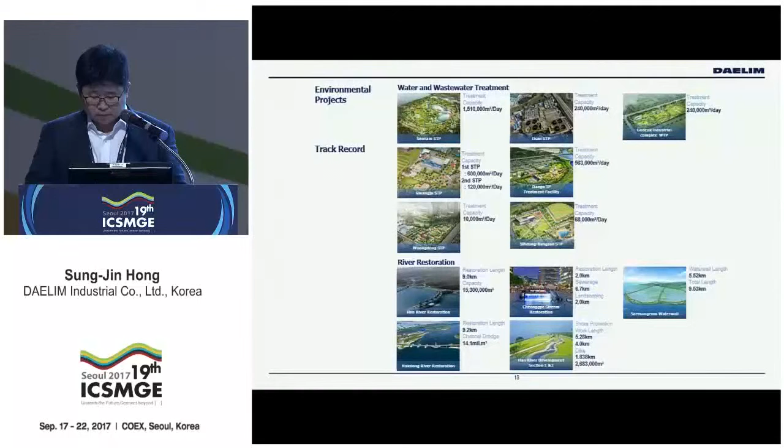Let me introduce Daelim's track record of bridge projects, the main issue of this presentation. Daelim has the best construction techniques in cable-supported bridges, which is the fruit of the most advanced bridge technology. Starting from Dolsan Bridge in the 1980s, Daelim has carried out many cable-supported bridge projects. By successfully constructing Yi Sun-sin Bridge, Daelim became the sixth construction company in the world and the first in Korea to have its own cable-supported bridge technology.

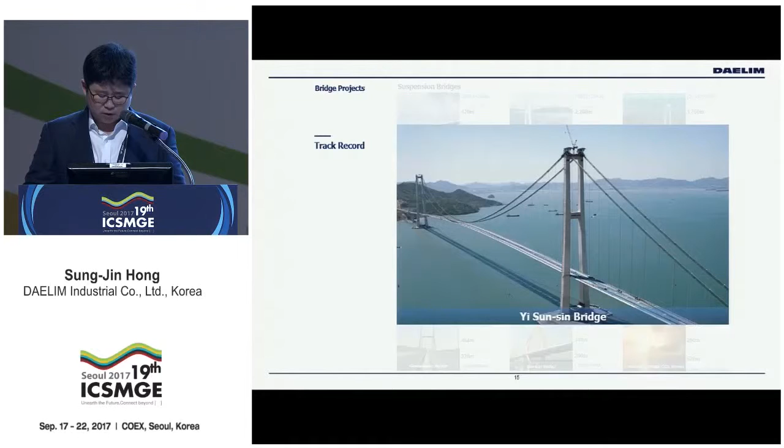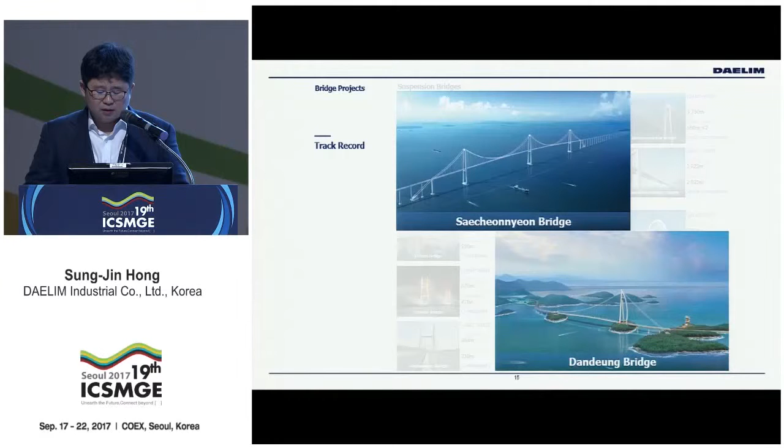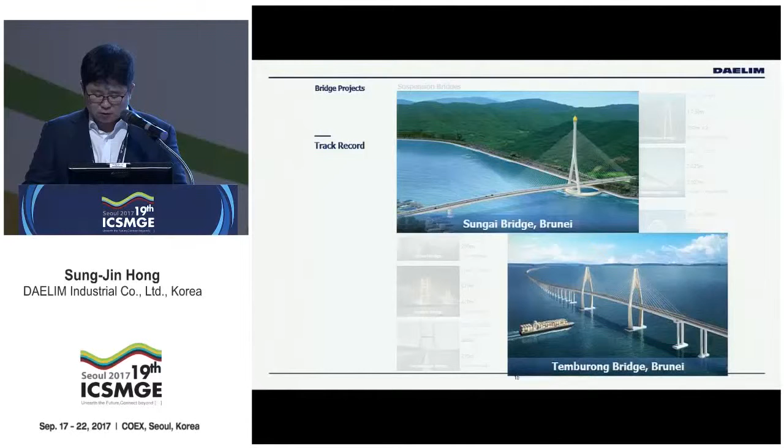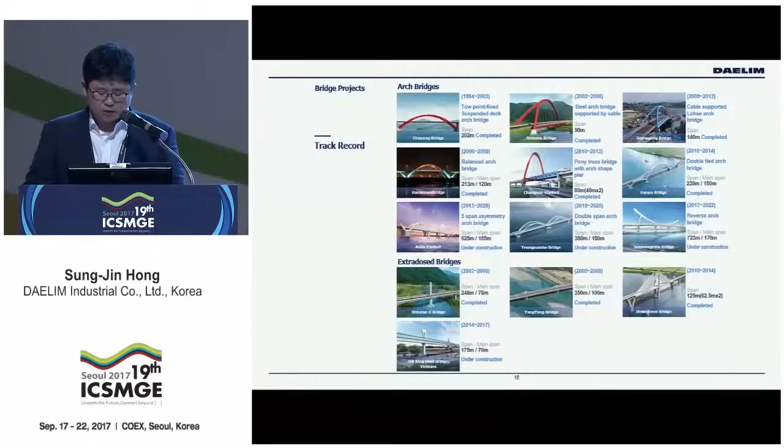After the Yi Sun-sin Bridge project, based on our advanced technology in cable-supported bridges, Daelim has been carrying out challenging bridge projects, such as Saecheonnyeon Bridge, a multi-span, multi-pylon bridge, and Dandeung Bridge, a single pylon and single span suspension bridge. Also, we are now undertaking overseas landmark bridge projects, such as Sungai Bridge and Temburong Bridge in Brunei, and Çanakkale Bridge in Turkey, which will be the longest suspension bridge in the world. Daelim also has a lot of construction experience and advanced construction techniques in arch bridges and extradosed bridges, as well as cable-supported bridges.

Let me introduce Daelim's main bridge project and the construction cases for geotechnical work. Seohae Bridge is a meaningful bridge to Daelim. Daelim could develop our own construction techniques for cable-supported bridges by performing this project. This is the foundation work of Seohae Bridge. The sea level changes and the velocity of the current are very high in this area, so we decided to construct the foundation using the cofferdam method.

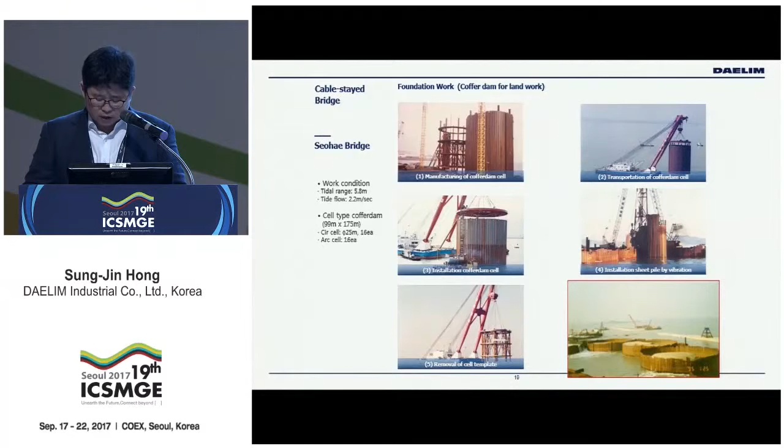The circular cell, which is 25 meters in diameter and made up of sheet piles, was embedded at the location of the foundation. By land filling the inside of these cells, the cofferdam for the foundation was constructed.

We are applying shallow foundation because bedrock was at a relatively shallow depth. A retaining wall was constructed inside the cofferdam to build the shallow foundation. The last picture is the aerial view of the cofferdam and the shallow foundation. The size of the cofferdam was 99 meters by 175 meters.

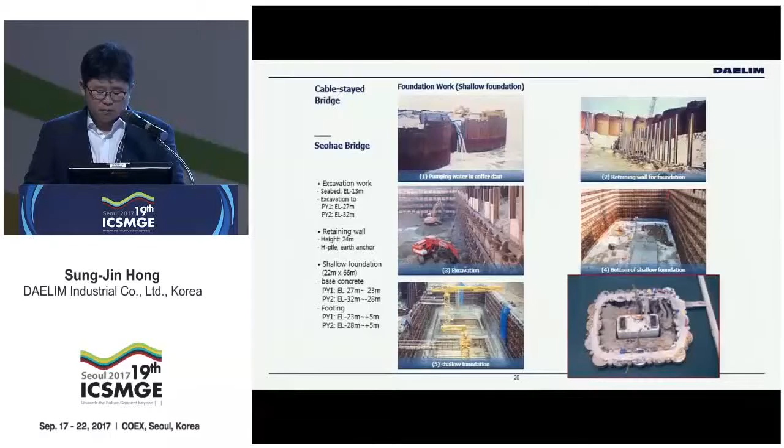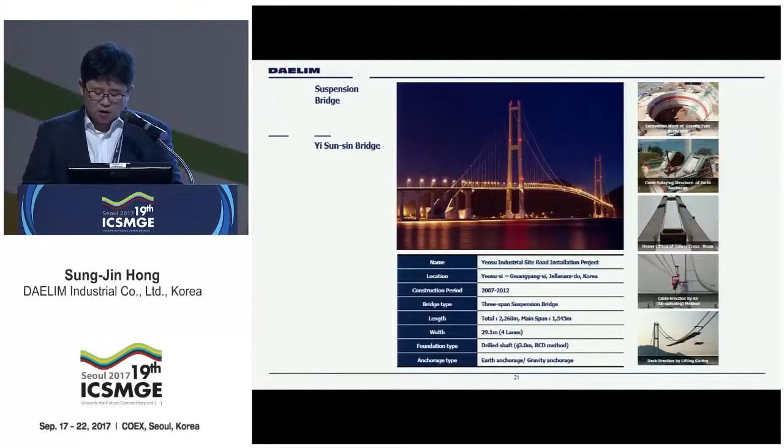Yi Sun-sin Bridge is the fourth longest suspension bridge in the world and the longest bridge in Korea. Daelim could establish our own construction techniques for cable-supported bridges by performing this project. In Yi Sun-sin Bridge, we applied drilled shafts for the bridge foundation because deep soft ground exists under the seabed.

Drilled shafts were constructed by landwork using ship collision protection. The soft ground under the seabed was improved by the SCP and DCM methods. Then the ship collision protection block was constructed by landfill through inside reclamation.

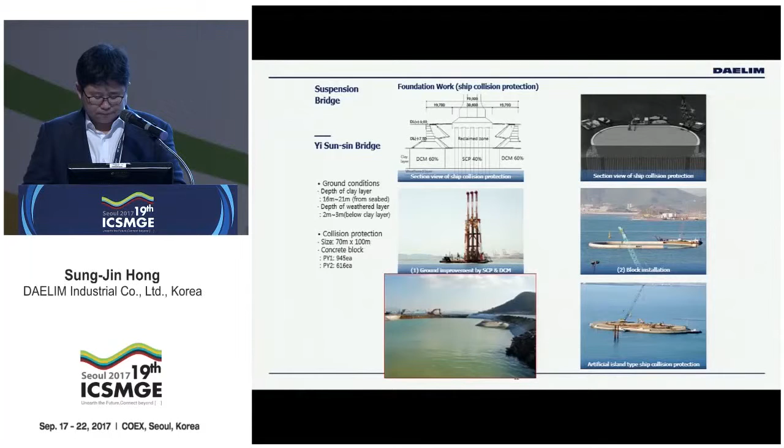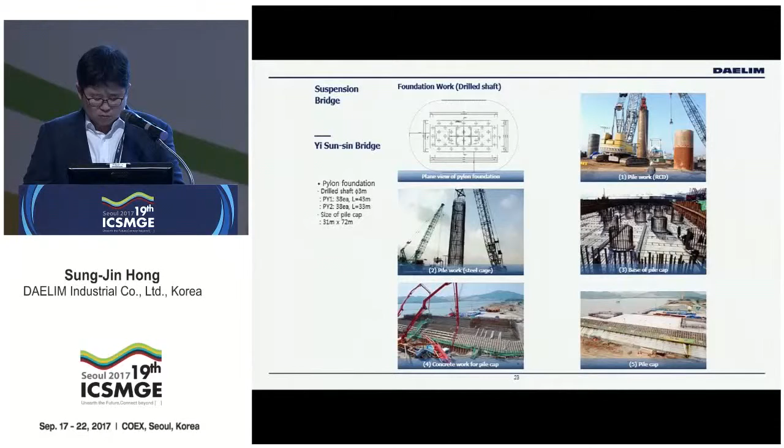The diameter of the drilled shafts is 3 meters, and the length of the drilled shafts for pylon 1 and pylon 2 are 43 meters and 33 meters, respectively. The pile cap size of the pylon was 31 meters by 72 meters.

Yi Sun-sin Bridge has two different types of anchorage. Anchorage number 2, constructed in the offshore area, is a gravity anchorage. A diaphragm wall with a diameter of 71 meters and 35 meters high was constructed, filled with RCC.

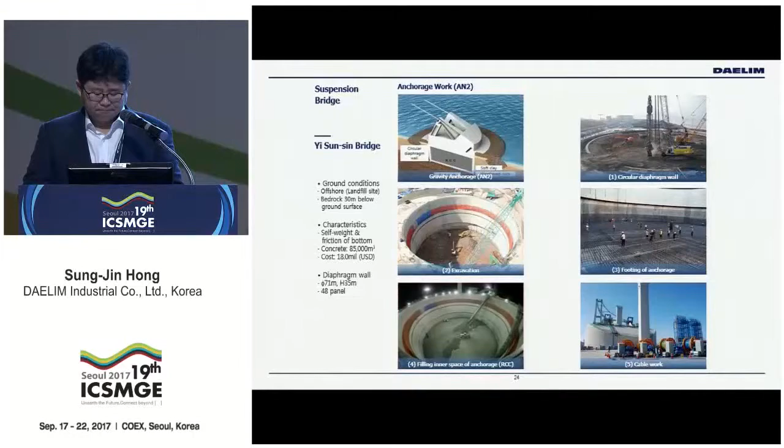On the other hand, anchorage number 1, constructed in the onshore area, applied a rock anchorage because bedrock was found at a shallow level. The rock anchorage resists cable force by the strength of the bedrock, hence we could reduce construction cost to one-third compared to the gravity anchorage.

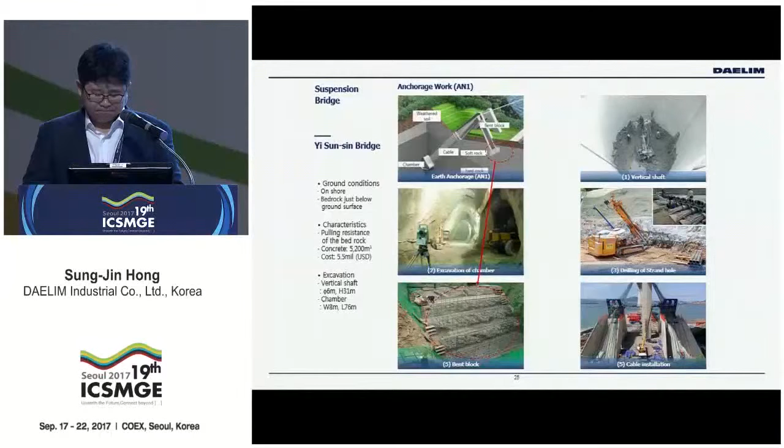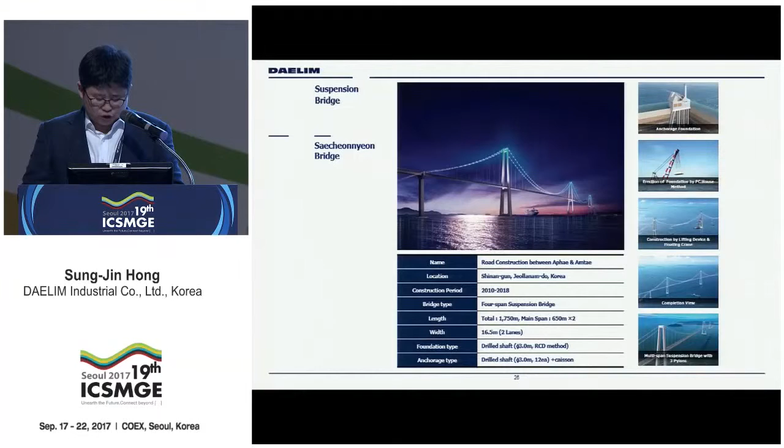Saecheonnyeon Bridge, a 3-pylon, 4-span suspension bridge, represents DAELIM's advanced technology for cable-supported bridges. Saecheonnyeon Bridge is located in a weak sediment layer with deep water level. One of its distinct characteristics is an anchorage installed in the offshore area.

The anchorage, which is a combination of drilled shaft and caisson, resists the tensile force of the cable by its own weight and the resistance of the piles. The inclined drilled shaft was installed to increase the lateral resistance of the anchorage.

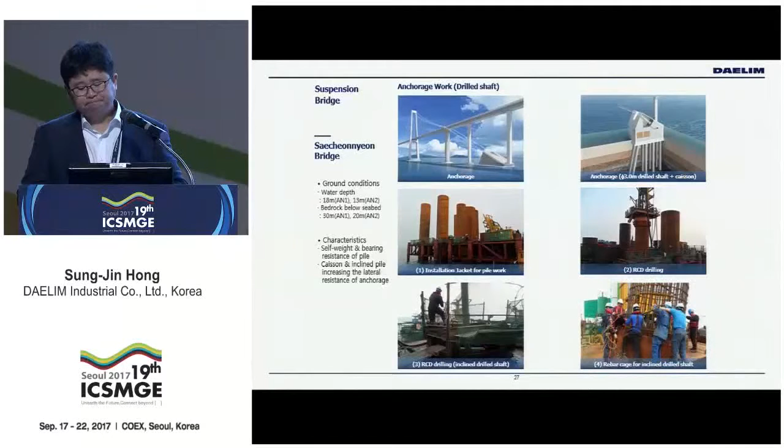The size of this anchorage caisson is 21 meters by 31 meters and 19 meters high. 12 drilled shafts with a diameter of 3 meters were installed. The last picture shows the anchorage being constructed in the offshore area. As you can see, the anchorage and the pier of the approach bridge are combined.

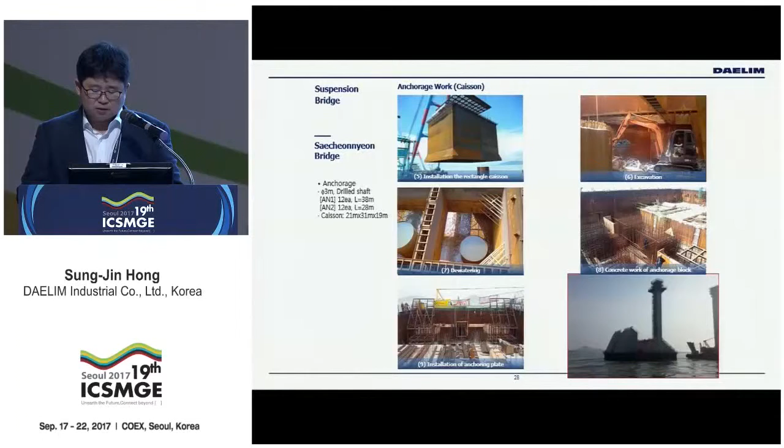DAELIM Civil Business Division has world-class technology in bridge, dam, marine works, and water treatment and supply projects. DAELIM, the global developer representing Korea, will give you the best solution. Thank you.

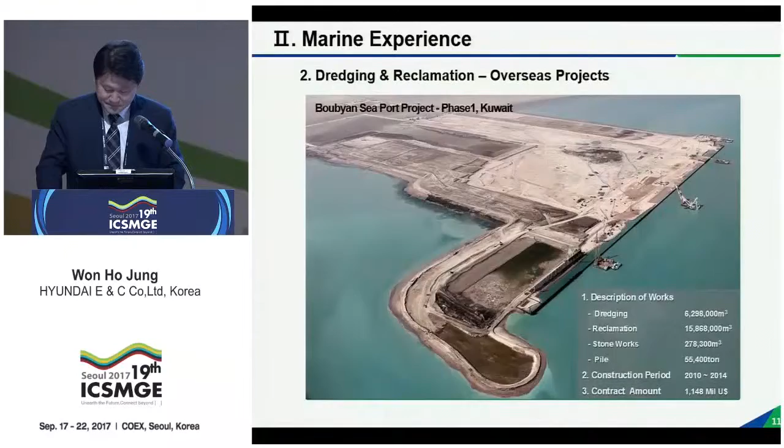This is Pasir Panjang Container Terminal, Phase 3 and 4, in Singapore. Total 150 caissons were installed to build a 5.6 kilometer quay wall. I was the design manager of this project for the initial 2 years.

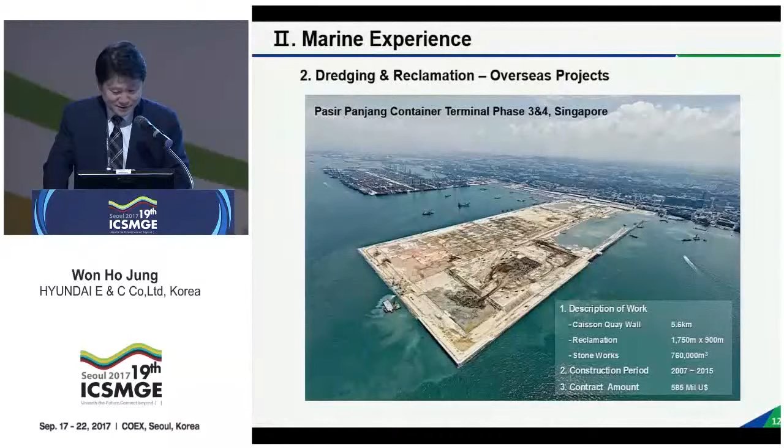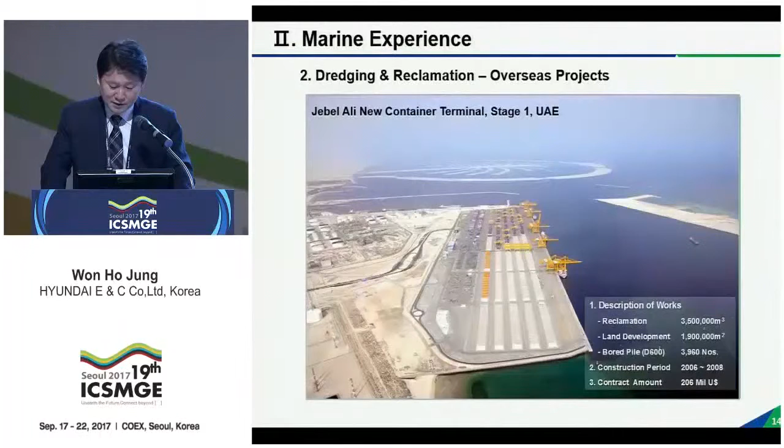This is Jebel Ali New Container Terminal, Stage 1, in UAE. For this terminal, we also did reclamation works, land development works, and some bored pile works.

This is Qatar Economic Zone 3 new port project. The main work scope was dredging, excavation, and reclamation works. A block type quay wall was built. Also, cofferdam and dewatering works were involved to provide land-based excavation works.

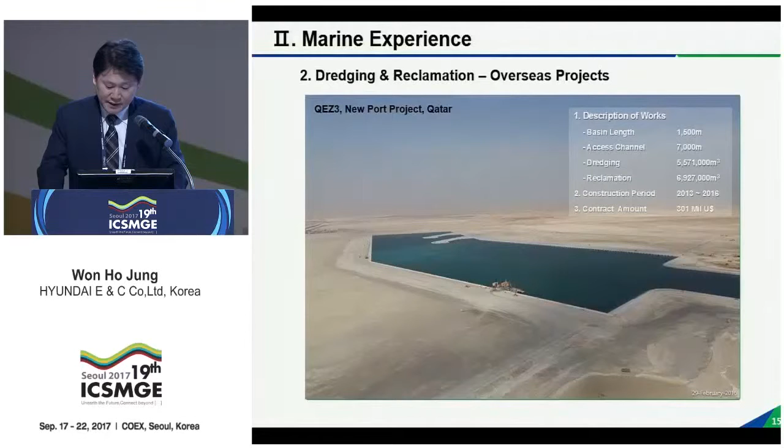The left figure shows Kwai Chung Container Terminal number 9 in Hong Kong. This project includes 2 kilometers of pile deck, quay wall, and dredging and reclamation works with ground improvement works.

The right figure is Khalifa Port and Industrial Zone in UAE. This project is similar to Jebel Ali. We constructed 4 kilometers of block type quay wall.

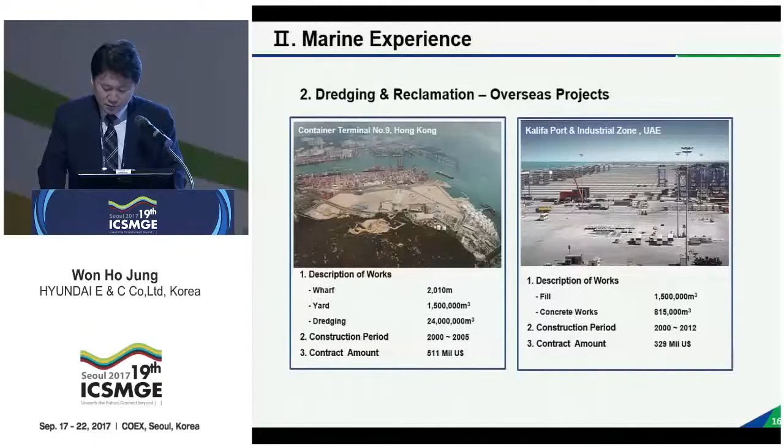Left is Pulau Tekong reclamation project in Singapore. This project is Hyundai's first project in Singapore. After this, Singapore became our major market for civil works. Currently, we are running 9 civil projects in Singapore.

Right is Jurong Island Phase 4 and Tuas extensions. As you see, the reclamation involved a huge amount of reclamation works using CSD, TSHD, grab dredger, and hopper barge.

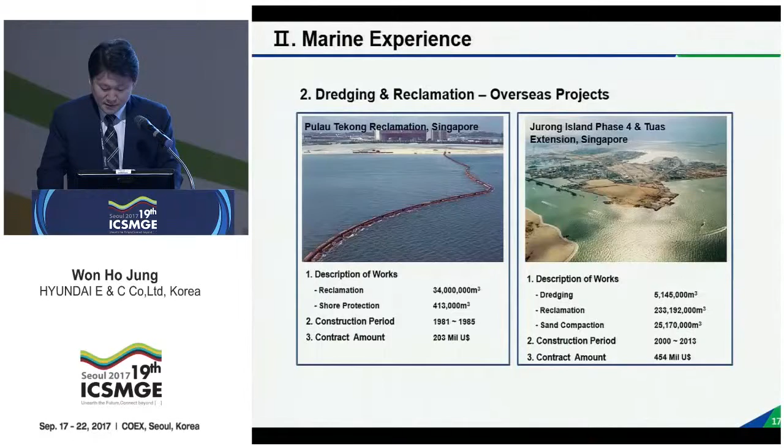From this page, I'm going to introduce several domestic mega projects. The first, on the left, is Seosan reclamation. This was an extensive reclamation project, and finally we got 15,000 hectares of land. As you see, we used an abandoned oil tanker to complete the dike closure under severe marine conditions.

The right one is Saemangeum reclamation, also involving extensive reclamation works and a 33 kilometer seawall, the longest one in the world. The reclamation area is about two-thirds of Seoul, 400 square kilometers.

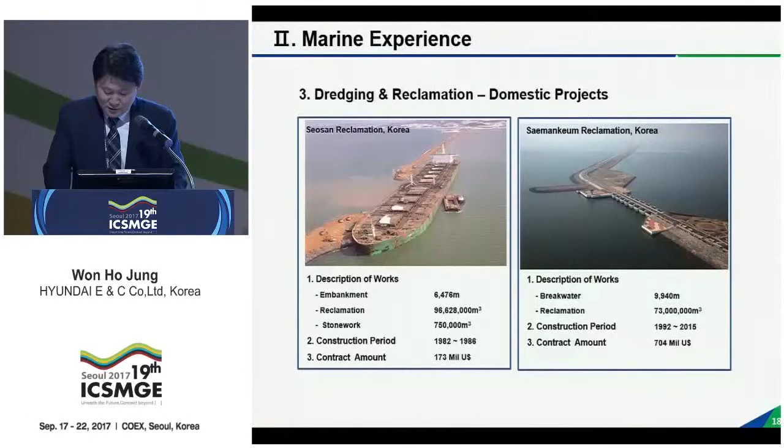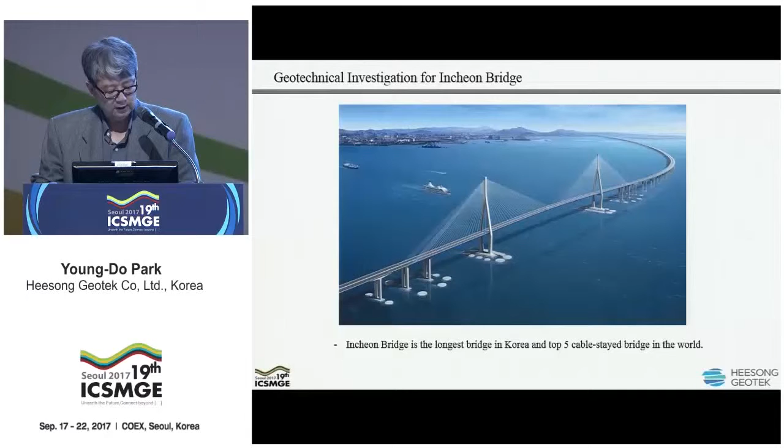This picture is a bird's eye view of Incheon Bridge. Some of you may have already passed the Incheon Bridge, since this is the main route connecting Incheon International Airport to Seoul. Incheon Bridge is the longest bridge in Korea, and one of the longest cable-stayed bridges in the world. We participated in the design stage of Incheon Bridge, and our role was geotechnical investigation.

I will introduce our electrical resistivity monitoring technology, especially applied to earth dams. Electrical resistivity monitoring is the electrical resistivity survey over a period of time. For earth dams and embankments, if leakage due to piping occurs, these subtle changes at the initial stage can be noticed. This is because changes in water content in the pore spaces of earth dams result in changes in resistivity values of dam material. So electrical resistivity surveys have been widely used around the world.

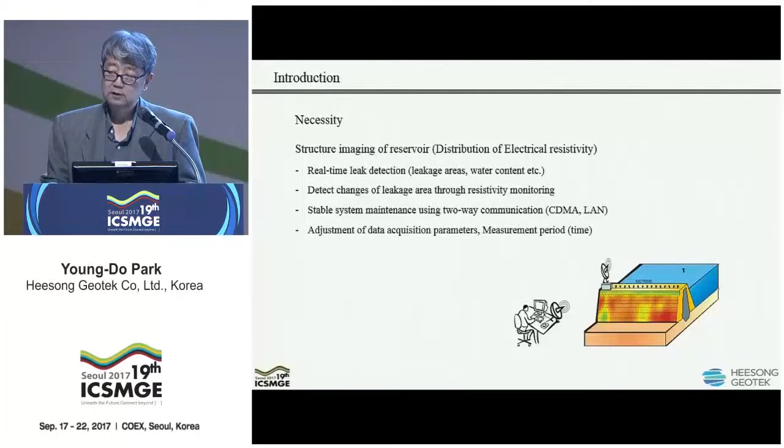This figure shows the configuration of the electrical monitoring system we developed. It consists of field systems, which measure, transfer, and save electrical resistivity. It also has an office system, which controls the field system. When several of these field systems and office systems are installed for dams, they can be combined or integrated through a web-based system.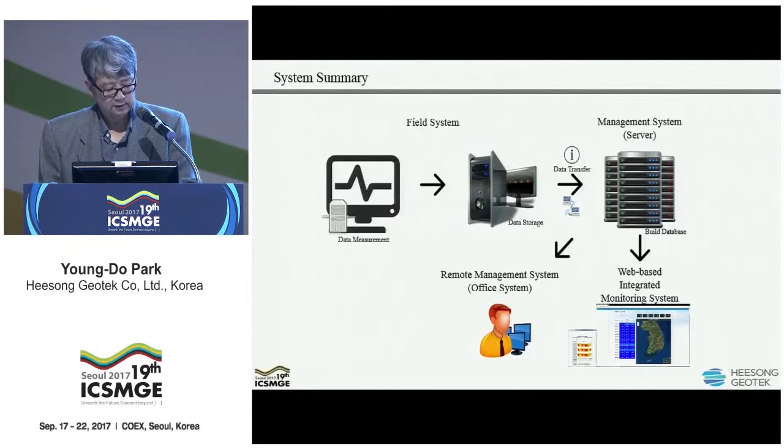We acquired 4 domestic patents and 1 new technology certificate with this system.

These are photos of the measurement equipment in the field system. The equipment automatically sends electrical current into the ground, conducts reverse analysis of the measured data, and transfers and analyzes data to the office system.

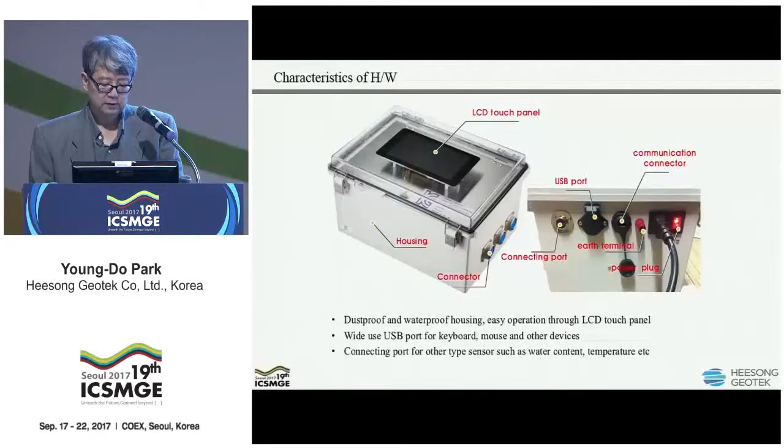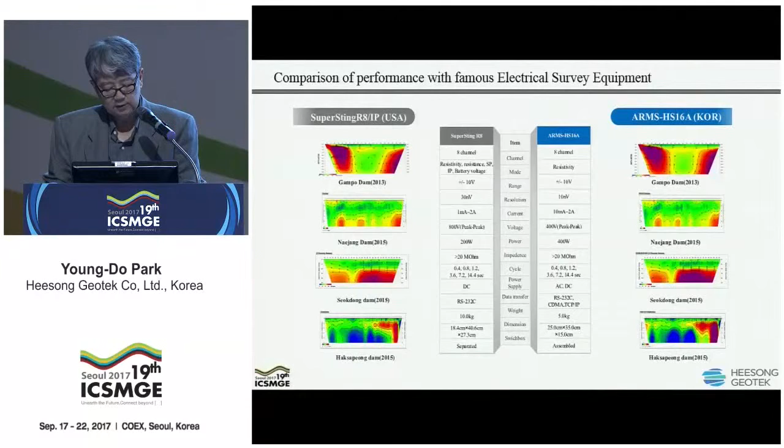On the left is the result of SuperSting, which is a very famous equipment and a kind of standard electrical resistivity instrument. On the right is the result of our system. As you can see, the two results are very similar, almost identical. This demonstrates the accuracy of our equipment.

Now our systems are installed at 13 dam or reservoir sites. There are a total of about 17,000 dams and reservoirs in Korea, and two-thirds of them were constructed more than 50 years ago. Recently, the issue of aging dams has become more and more important in Korea because several old dams and reservoirs have collapsed.

I will introduce the earthquake early warning system related to the business field of our seismic engineering division. The definition of EEWS, or earthquake early warning system, is very simple: a warning is issued through EEWS before earthquake waves arrive at cities, to prevent major damage by earthquake. The scientific basis of EEWS is that the damage-causing S wave propagates slower than P waves, so we can use P waves to stop facilities such as gas pipes or electricity.

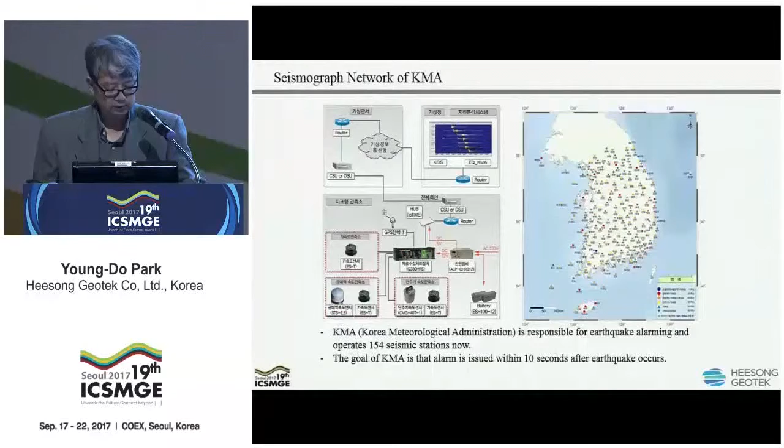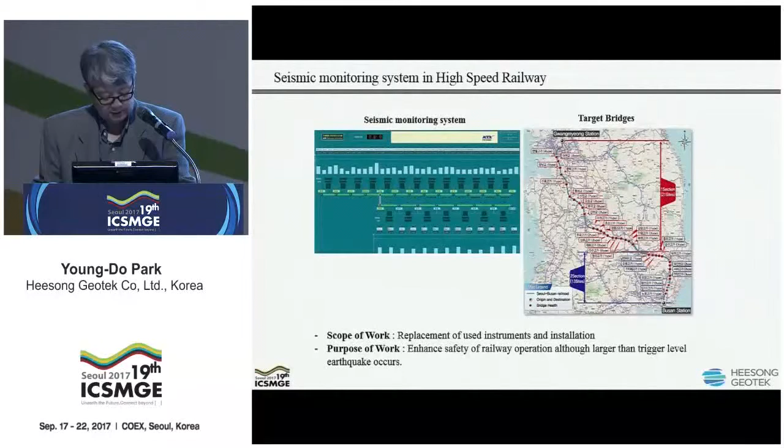Two high-speed railways are operating in Korea. One goes to Busan, and the other is called the Honam Line. We were able to carry out the project of installing seismometers at the Gyeongbu Line in 2015.

Next is about our maintenance of seismic stations. We have installed 592 seismic stations from 1998 up until now. As you see, we have constructed most of the public seismic stations in Korea.

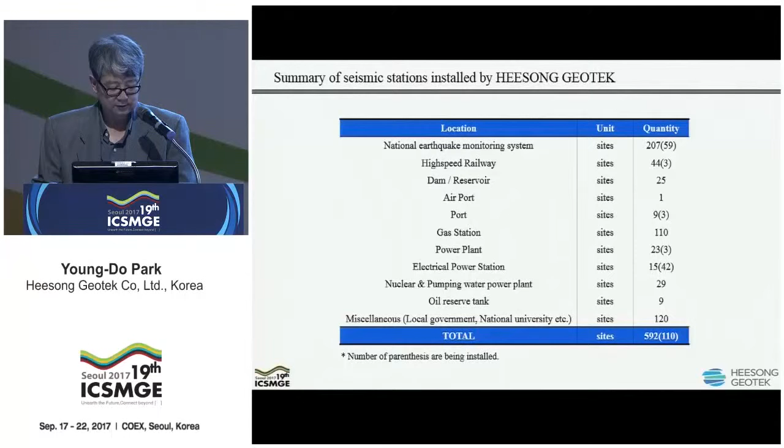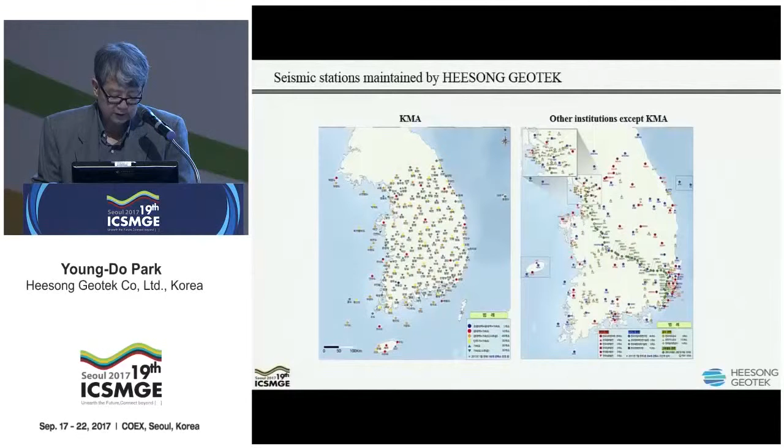In 2017, we are maintaining a total of 461 stations. I'd like to say almost all public seismic stations are maintained by us. I believe this is because we have trustworthy technology in this field.